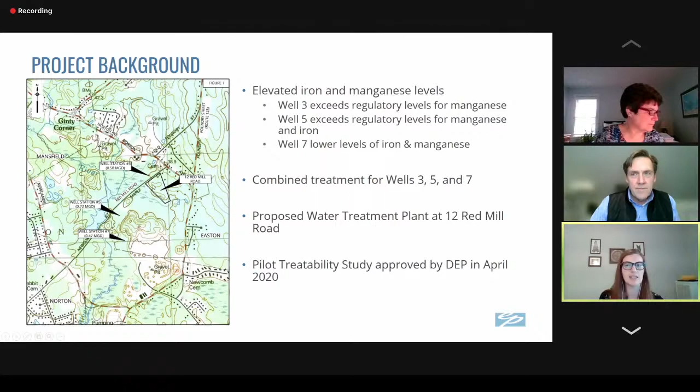We're proposing a 1.69 MGD treatment plant, which includes an administrative area, laboratory, and mechanical and electrical rooms. For the treatment itself, we have pressure filtration, chemical feed systems, and a below-grade clear well for storage of finished water and pumping. We've also reserved an area within the building for PFAS treatment to be installed in the future if needed, though not currently needed. The proposed building is a single-story, pre-engineered metal building, approximately 6,900 square feet, with 2 residuals handling lagoons, bioretention areas, and an access driveway.

So for an overview again, we have our proposed building off of Red Mill Road, our lagoons, and the 3 well stations over here. So we did look at 3 alternatives.

Briefly, our preferred alternative is to locate the treatment plant on the 12 Red Mill Road parcel. This allows us to develop most of the treatment plant outside of the Well 3 Zone 1. The treatment plant itself will be located entirely outside of the wetland buffer zones, and it's town-owned property.

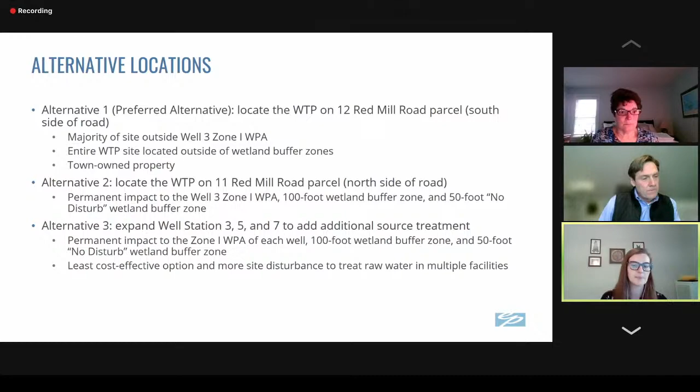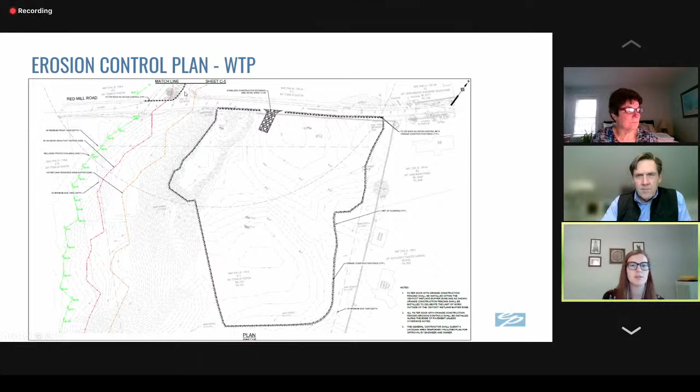So you can see some filter sock along the access road up to Well 3. And then at the well stations, again, we have the sedimentation controls along the access road and in the areas where we'll be doing some work and adjacent to the existing limit of clearing.

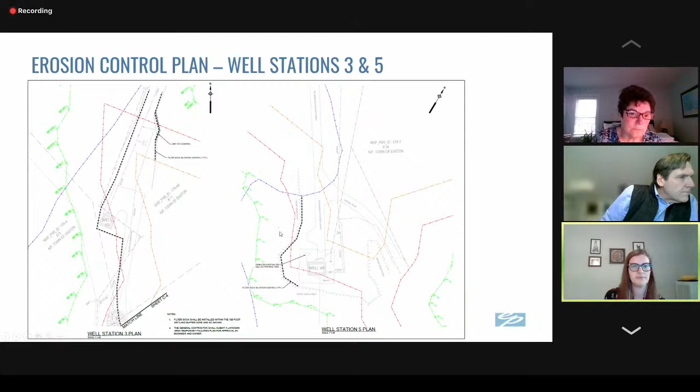And then, as I mentioned, we have 2 on-site lagoons to the south of the site, a septic system, and for stormwater controls, we have grass channels and 3 bioretention areas for infiltration to the ground.

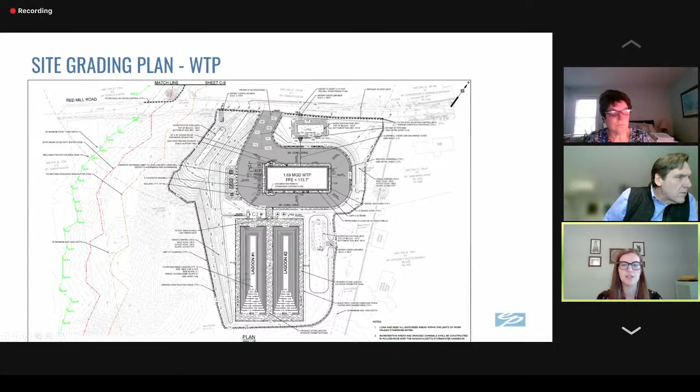So these residuals will flow into these lagoons. They're lined with an HDPE liner. So solids will settle in the lagoon while the water will percolate through a thin drainage layer and an under drain system that's all within that liner.

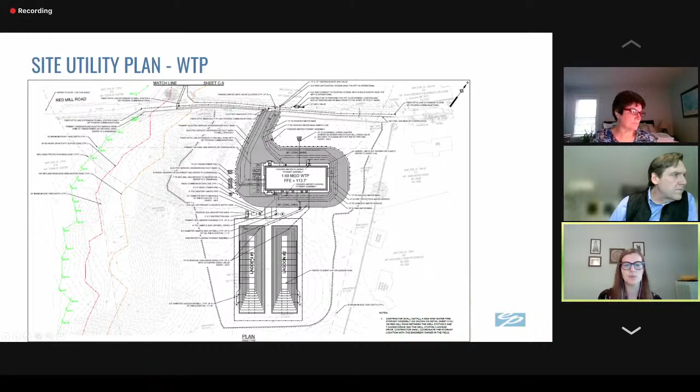The under drain will pipe the clean water to the dry wells for infiltration to the ground. And the solids that are ultimately settled in the lagoons will be excavated and disposed off-site.

And then at the well stations, we have utility work at well station 3, all within previously disturbed areas. And then at well station 5 and 7, which isn't shown, 7 only includes a utility line under the access road along there. And then at well station 5, we're proposing 2 1,000-gallon propane tanks, again on previously disturbed areas, and its associated utility work.

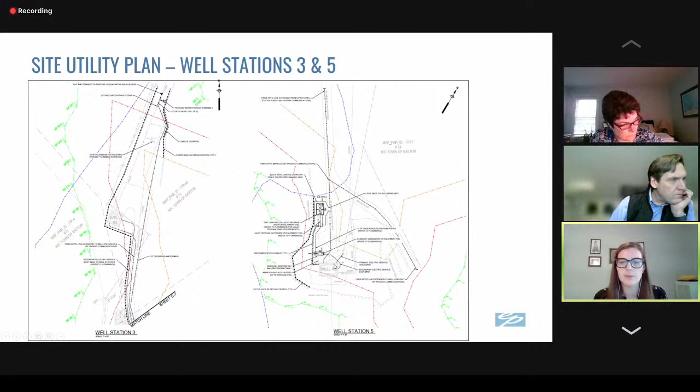I'm running through this a little bit, but I'm happy to take any questions once we get to the end.

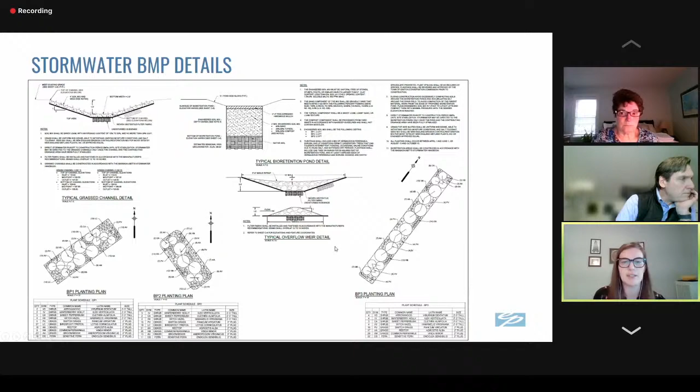And just in summary for resource area impacts, we're approximately 9,000 square feet of temporary impacts within the buffer zone only. The only permanent impacts is for the propane tank installation, which is about 185 square feet of permanent impacts at well station 5, and again, that's within a previously disturbed area. And then approximately 700 square feet of temporary impacts for utility installation to the bordering land subject to flooding. And we have no impacts to the riverfront area.

So with that, I'm happy to elaborate on anything and take any questions.

So I actually don't have any questions. The application I thought was very complete, and the erosion controls, which is our big area because the disturbance is temporary for the most part. So I think you've done a great job putting this plan together.

Does anybody else on the commission have a question? I am all set, Rory. Thank you, I'm all set too. Great job, guys. Thank you.

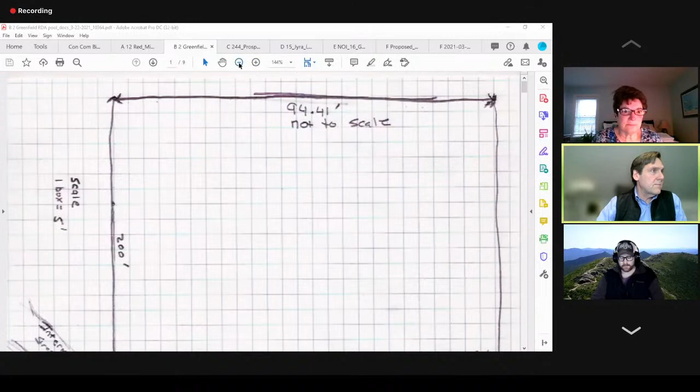Okay, so we should be able to see this plan, this hand-drawn plan. Everybody see that? Yep, I see it. Okay, great, thanks.

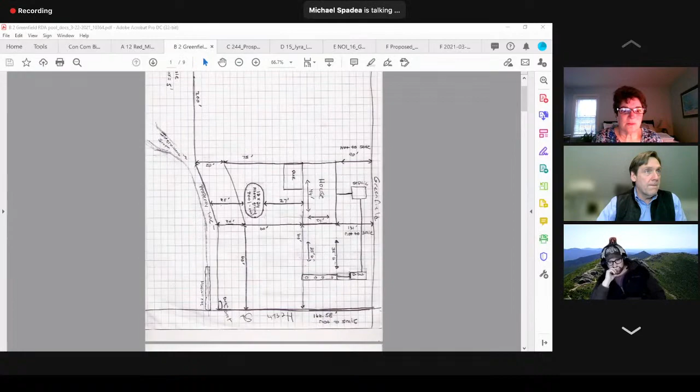So why don't you tell us a little bit about what you want to do here and conditions and whatnot? I'm just trying to get basically a 12 by 24 oval above-ground pool in my backyard, trying to keep it obviously within all the buffer zones.

I have an intermittent stream that you can see that kind of runs through my back property line. It's like right behind it, I would think. That looks like it's in the way, and the building inspector asked me to run it by you guys before I went any further.

Okay, so I am putting the wetland line, the intermittent stream he identifies is there. It has a little bit of a very narrow bordering vegetated wetland along the edge of it.

And then it's lawn back, and then it's fully lawn after that. It's very flat, a very flat backyard, and it's been in place, the house has been in place, Jeff, since 1971. Correct.

We don't have, the only application we had earlier was for a shed, that was relocated out of the wetland, close to the wetland here. It was moved away from the wetland. And other than that, there's no history on this site.

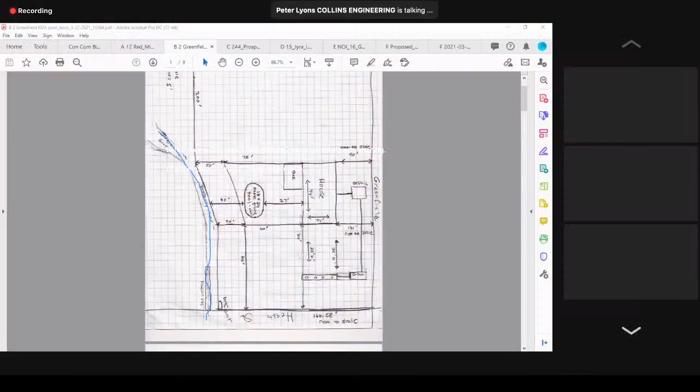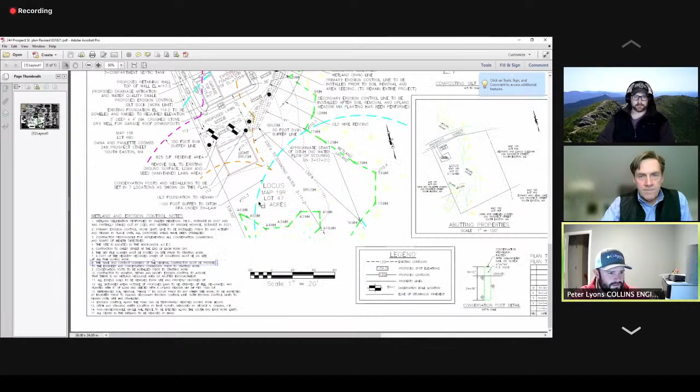Sure, I will start with sharing the screen. Can someone just confirm you can see it for me? Confirmed. Awesome, all right, I'll start with the close-up picture and give a little bit of history, and then we can move around the plan as it makes sense. So this is a...

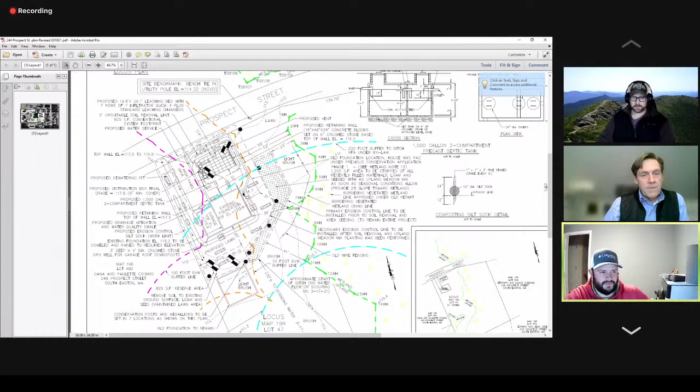...revitalization of a 2009 project we were involved in, initially for the raising and reconstructing of a single-family home and the associated septic system in the front yard. Quick history of the lot: back in 2009, this project was approved through conservation, and the foundation actually went up, the stick framing was in place, and the current owner had gone bankrupt at the time. So over the years the building deteriorated, and now what's left out there is simply a concrete foundation with a gravel floor and a bunch of fill around the project.

Just looking at the plan quickly, we're proposing a relatively smaller single-family home, and right behind it is a red outline, that's the existing lot, which was in place prior to 2009. Now the existing foundation, as shown, is actually on the site, and the existing contours reflect what's there today. So what we're doing is basically looking to finish developing the site by bringing the building up, building it out, and installing the new septic system pretty much as originally proposed.

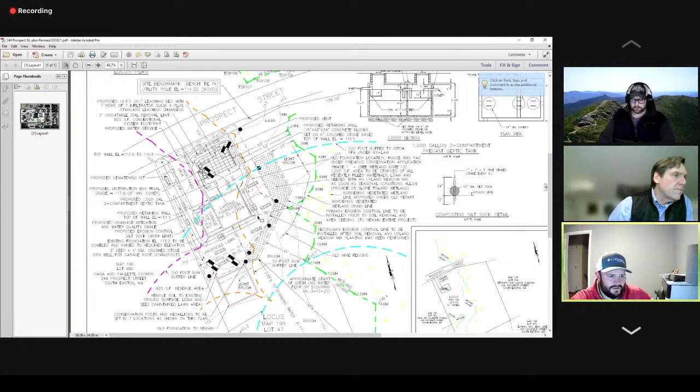Just a reminder, that's kind of in place. Otherwise, we'd push to move that out. With the original proposal, wetland flag 8 was kind of more in line with 6 and 9.

So, 12 years ago, we had originally proposed the 50-foot separation, but now based on the change to the wetland, the house location didn't change, but the wetland did. So we're proposing kind of a two-stage process.

One is going to be removal of a lot of the filled materials that encroach into the wetland buffer. So we're looking to strip that down a couple feet in some spots, loam and seed it with an upland meadow mix, and allow that to naturally revegetate.

We would then be reestablishing a work limit between that and the proposed work, kind of establishing the lawn line at that point, going around the project.

The septic's going in the front. Proposed driveway to a garage.

We will have a surface water swale to the west side of the driveway to bring any additional surface water down and redirect it toward the back of the site, kind of matching the original runoff patterns.

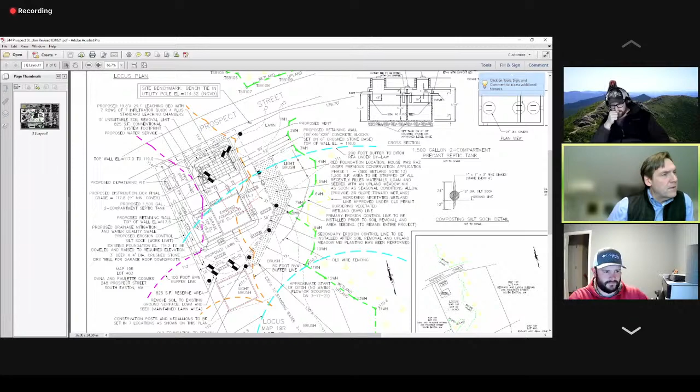So Peter, what's proposed between the area where you're going to change the fill and the lawn area? Is that a retaining wall that's going in there? What are you looking at right here? Exactly. No, that's not a retaining wall.

This drawing doesn't show it great, but one of those lines is basically the edge of the seed, and then the 23-foot line, that's our work limit. On the CAD version of the plan, that line's thicker where the erosion control is, so basically we're proposing seed right up to the erosion control.

And then once that's taken off, we're going to provide an additional erosion line to the western edge of that seeded area.

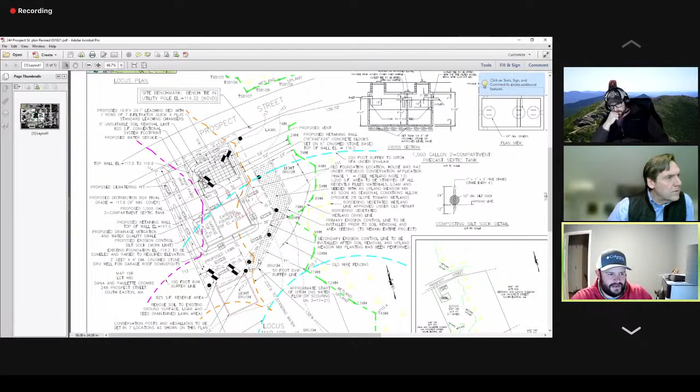So how are you going to make the transition from the house to the level where... right now it's about a 3 or 4 foot drop, right, where that fill is? It is currently, yep.

So we're looking to strip out that material pretty much back to the foundation. Ultimately it leaves us with a lot of concrete reveal on the foundation, but without dragging the grading closer to the resource areas, that's kind of just going to happen.

No, I understand it better now. Yeah, so looking at the house from the wetlands, it's basically going to be a flat area till you get to 6 or 8 feet of the house, and then it's going to be a 3-to-1 up to the foundation.

Got it. The one thing I do want to point out is Peter pointed out that the previously existing home on this would have been, under the current conditions, 31 feet from the wetlands, and this home is 36 feet.

So as Peter said, the original design it would have been 50, but the wetland has changed. So short of taking up the entire foundation, I think they're probably doing about the best they possibly can here. It was going to be in a better position than it was originally.

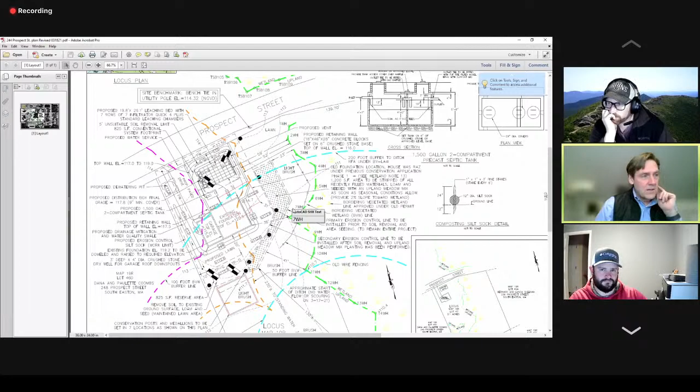Having been out on the site, this is probably one of those few sites in Easton that appears to be an abandoned site. You really don't see this very much in Easton, and I can't imagine what it looked like when it had actual lumber up on the foundation.

Getting this house finished and built is certainly a big improvement for sure.

So I think the one thing, Peter, maybe we could just cover it - I think I know what is going to be said, and I've read the packet and whatnot, but could you just give us a little bit of the rundown on the waiver, since we're working inside the buffer in the ACEC?

Sure, let me just grab the report quick. Basically, I'll just skim through it quick, and if there's any questions, stop me. We're looking at any reasonable alternatives.

There would be alternatives if the existing foundation weren't already in place, but we don't really have a lot of room. In order to develop this lot, we need to fit a house and an appropriately sized septic system. The way everything's spaced now, we're as close to the road as we can be, and as close to the septic system with the house as we can be. So we're really doing our best to tuck everything into that furthest jurisdictional corner of the lot.

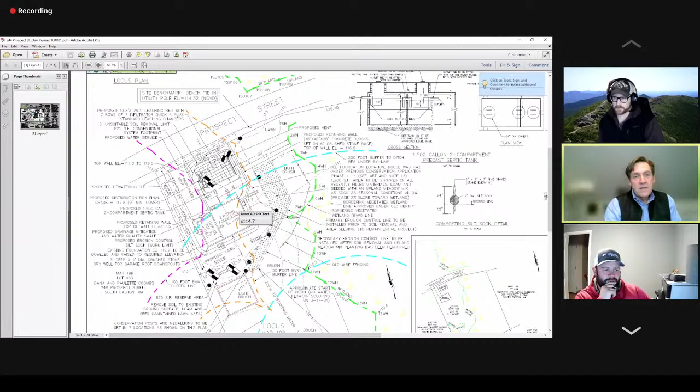Yeah, proposed. I think it's really important for us to consider this was a previously disturbed lot. It had a house on it, so it's not like he's trying to develop an empty lot and fit a house on it. This had a house on it.

It is, like you said, kind of a weird way of going about it, but the alternative is to knock that foundation down, and you really don't have any options there. Even if you knock it down, you're only going to improve it by a couple of feet. You don't have a ton of room here, so that's not really a practicable option.

Secondly, we're looking at minimization and mitigation measures. As we said, we're removing a large area, 1,200 square feet, to be stripped of fill and restored to more of a natural condition. Right now it's not a loam covering, it's just loose subsurface fill, not really supporting vegetation.

As far as accommodating public interest, I do the survey work out here, and I had at least 2 or 3 of the neighbors say, 'Oh, thank God they're finally doing something with this, this is an eyesore to look at. We don't really care who buys it or what happens, but we would like to see something happen with the lot.' So I think that tells us the public interest is cleaning up this eyesore that's been around for 20 years now. So I think that's kind of a no-brainer and really the only answer we have.

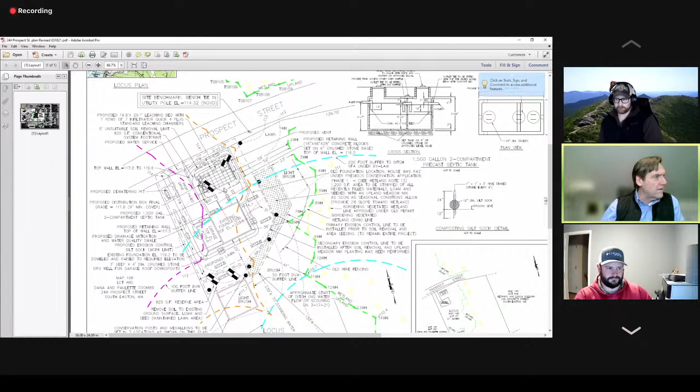What's the material? The driveway is meant to be impervious asphalt, but you're going to direct it away from the wetlands anyway. Yeah, ultimately it's going to end up down there, but we're providing a grass swale system, basically with the longest run we can before it would intercept the wetland area.

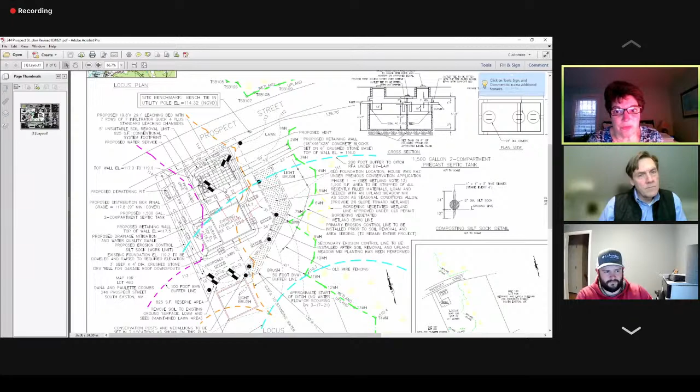Okay, Andrea. All the abutters were notified. I just wanted to clarify a couple points that Peter made. One was that the area of fill he's taking out was not authorized by the original decision. In the construction of the foundation that's there today, the contractor went beyond the approved limit of work and created this swale. By creating this mound of fill, the wetland moved forward.

It wasn't, you know, it was the fill that was put there. So I think it would not be quite accurate to say that he's returning it to original — what would have been the original. This fill is not in any way mitigation. This is just bringing back what was never authorized. Got it — restoration. Understood.

The second thing is that permanent markers are going to be put at the top. In speaking in the field, I understood that was a post and rail fence. Because there's a very limited amount of lawn area, a limited amount of active space around this house, you're not going to be able to maintain your limit of work with markers.

The third thing is that the stormwater discharge — Peter described it as just roof runoff that's being collected — but in 2008 there was a stormwater analysis done, and all of that swale was designed to take all of the driveway and all of the roof runoff was supposed to be infiltrated. So I certainly hope that the engineer is going to offer to do as much as was done in 2008.

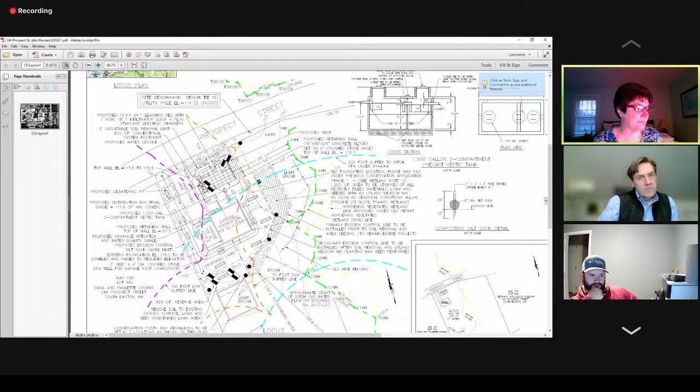The second thing was sustainable lawn practices weren't put in here, and to be consistent with projects that you've been approving, I understand the alternatives analysis is limited by past decisions. I do encourage you to consider that the site is very low quality wildlife habitat now, and you could do buffer zone restoration. And if you didn't consider that eliminating a hazard created by someone else is enough public interest for the site, I honestly can't make a recommendation to approve this project as proposed.

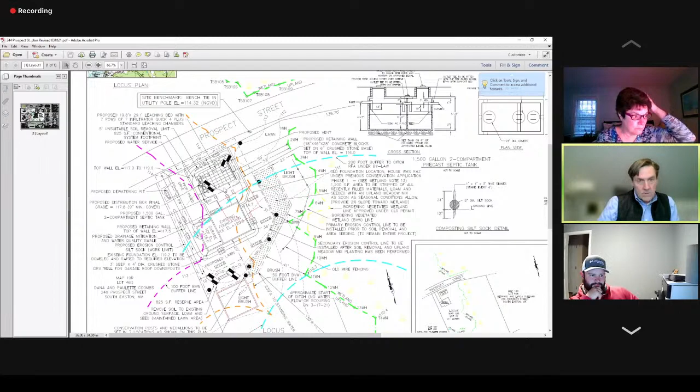Okay, I'll circle back to that, I wrote some notes down. I just want to give other commissioners a chance to make comments or ask questions. John, you've got the floor, buddy - this is more your territory for sure.

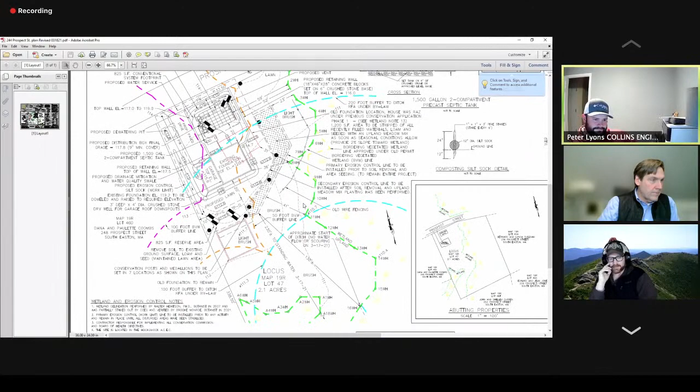Thanks, Mike. Peter, do you mind scrolling down a bit in the plan? Yeah, that's good right there. So I guess my question is, what's the purpose for leaving the old foundation there, down past the markers?

That old foundation is almost non-existent, just barely sticking up above the existing grade. I honestly didn't even notice it the first time I was out there. Okay, and we subsequently added it to the plan, kind of just as proof that the site has been developed historically rather than having any real engineering implication. Right, there's no reason to remove it, otherwise you're just disturbing everything around it.

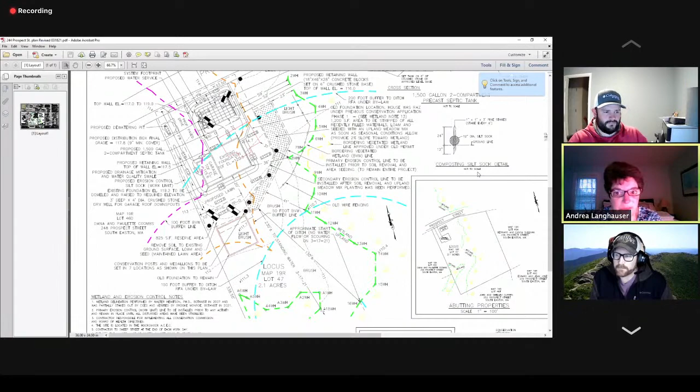Right, I guess my question - it's got a gravel base in between it. Why not extend part of that restoration towards that area as well, and maybe instead of grass, plant some sort of wildflower seed mix that you'd only mow maybe twice a year, or once every year? That provides a benefit for habitat potential within an ACEC. Just some food for thought.

Okay, Mike, anything? Nothing for me, nope.

So I think that when the calculations were done on the hydrology of this site back in 2007, I remember a presentation of data and some handwritten calculations by one of your engineers. Did that include runoff infiltration of the house roof as well? To be honest, in 2007 I was just wrapping up high school, so I wasn't involved in this. But Andrea, do you recall? That's the way the staff report was written - it was full building.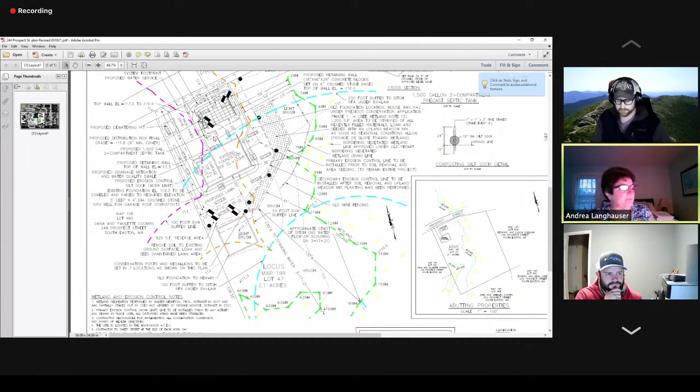So I think if that's the case, Peter, given where we're trying to put this house, if we want to infiltrate the roof runoff from the main portion of the house as well, or design whatever infiltration you're using to handle all the roof runoff.

It's definitely an option. One thing we were discussing was that by lowering the site down so much in the back, we don't really offer ourselves many underground infiltration options. We're proposing a 113 contour behind the house, so that's not going to be more than a foot or two above the wetland line vertically. We could accommodate more infiltration, but it would ultimately probably result in bringing the grade up a little more - so it's a balance. We don't have room up front to do it, and we try not to do that stuff under the driveways. So it's an option, but there's not really much room.

Great, so the alternative is to go back and redo your hydrology calculation. Yep, and that's something I haven't personally looked at. It was explained to me that at the original approval, the subsurface system was designed only to accommodate the increase in flow from the historic building and the new proposal - but I could be mistaken on that. No, I think that's how it was explained. I think that could be accurate, but someone's going to need to address that issue to clarify it. And if it is accurate, that's not how the commission interpreted it. Okay.

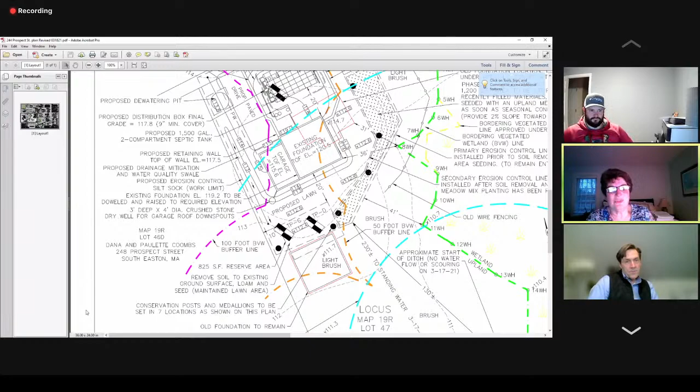Yeah, I think you can make the argument that it was raised because it was condemned. It had fallen, and it's 23 years ago. It was not... the permit was not kept alive.

I understand that. I'm sort of respecting the spirit of the prior permit, but understanding that to us this is a brand new permit. But at the same time, I do want to account for some of that consideration here. That's my viewpoint.

So let's try to give you some perspective here to take back, because there's a bunch of questions. I think we probably should have a calculation about impervious surface increase on this, and then talk about what the offset to that should be—whether that's enhancing the area where the former barn was, putting it back to naturalized habitat that could be used, or dealing with the roof runoff from a sense of this.

Just for the record, Commissioner Lundin did join us just now. So respectfully, I'll ask that she not vote on this, although I think we're going to continue, unless the applicant wants us to go to a vote.

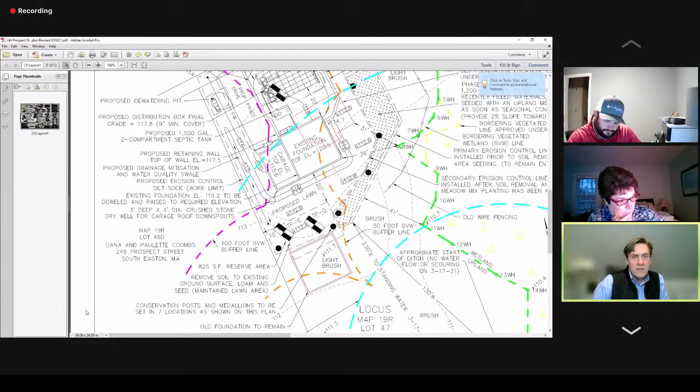Does anybody else have anything we might consider? I think you touched upon it, Rory. Good to go.

I don't think, Peter, much of this is going to come as a surprise to the team. Most of it was discussed with Andrea out in the field. Yeah, no, we were expecting plenty of comments. It's kind of a tough project, so we got some input, and we can definitely look into those things and come back with some more answers for you.

So from my perspective, there's an opportunity for us to give some small amount of credit for the fact that there was a house on this lot 20 years ago. It's hard to give you full credit for it because it was 20 years ago—another 10 years and maybe it even goes naturalized, except for the hole in the ground. I think it would certainly benefit everyone that we get this lot developed. We just need to stay within the confines of the regulations.

Yep, understood. So, any public comment for 244 Prospect? Seeing none, I will assume you want to continue, Peter. Yes, please, to the next meeting. We should be all right for the next one.

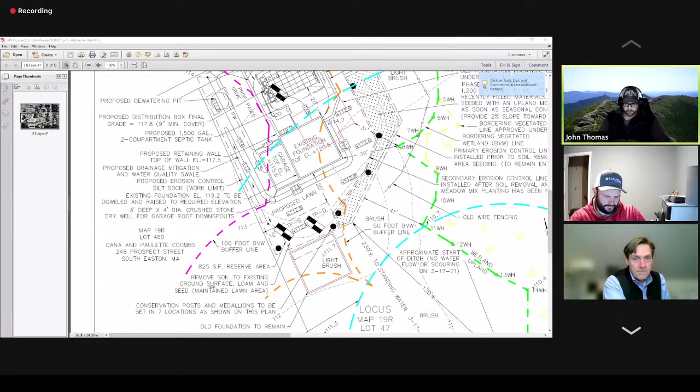Okay, so I make a motion to continue 244 Prospect to April 20th. That's a Tuesday, Peter. Thomas, second. Roll call vote: Kallfelz, aye. Beatty, aye. Thomas, aye. Thank you. And Carol, you want to abstain officially? You're muted, Carol. Lundin, abstain. Thank you. So Tish, we got 3-0-1 to continue. Thanks, Peter.

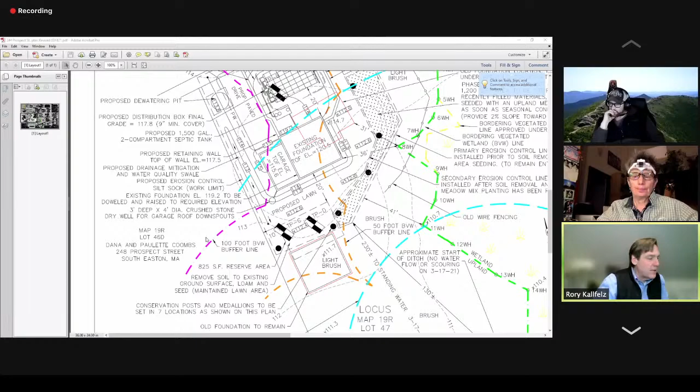Next one up is 15 Jyra Lane. This is a notice of intent to upgrade a single-family septic system. Right, you bring up the plan. It's not it.

All right, let's try this. Bear with me here, I'm trying to get the drawing up for you.

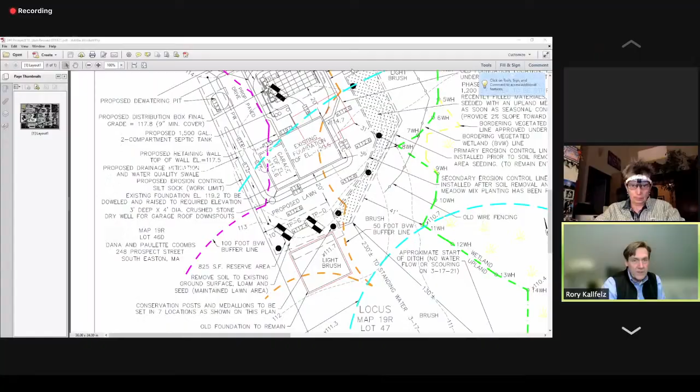All right, I'm ready. Can you guys see my screen again? Awesome, so this one's a little more straightforward. This is a septic repair on an existing single-family home on Jyra Lane.

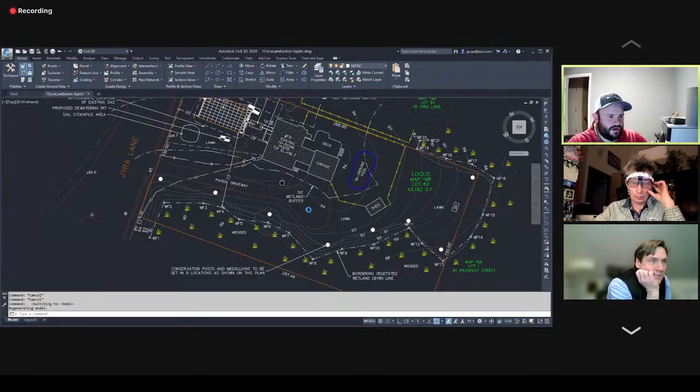We have a bordering vegetated wetland that wraps around the south and eastern portions of the property. The 50-foot buffer cuts through the middle of the site, and the 100-foot buffer is just the northern portion of the lot. Our proposal is to replace what's there, including a new 2,000-gallon septic tank and a 25 by 41 leaching field.

This is all being done in existing lawn area outside the 50-foot buffer. Our work is as close as 73 feet to the wetland, and our erosion control looks to be just outside of 50 feet. We have provided stockpile areas and dewatering outside of the 50-foot buffer in the existing lawn areas. As always, we provide erosion control wrapping around pretty much the whole project.

We show conservation posts around the edge of the existing tree line. There's a total of 8 shown on the plan, spaced about every 30 to 40 feet around the lot. I guess that's about it. Any questions?

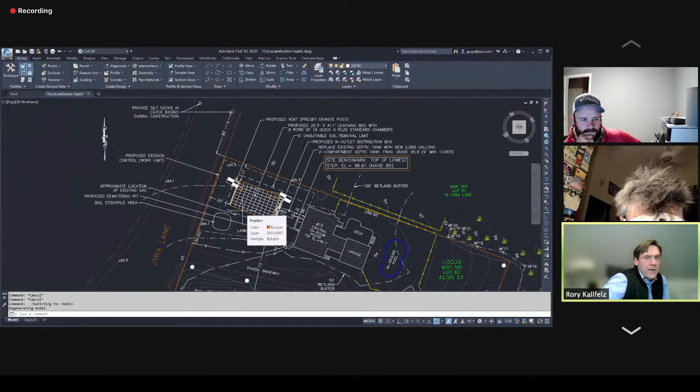So Andrea, you want to give us a summary before we get into ours? Sure, very quickly, the abutter notifications have been posted. If you could please lift your site a little bit to the north so we can see the full drive and the back property line.

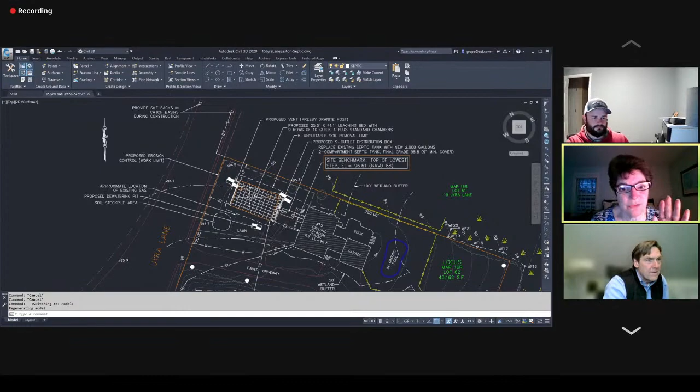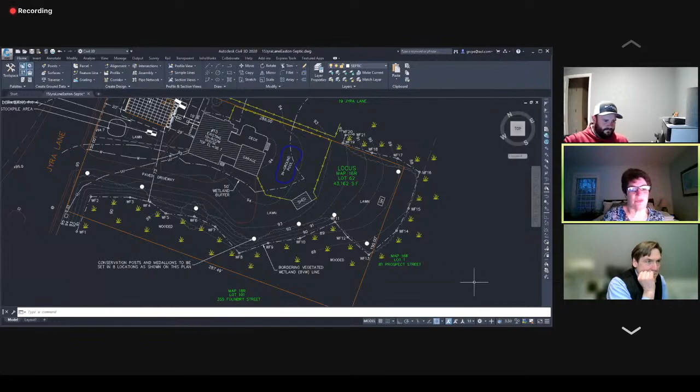The reason I want to point out the back property line is that the lawn area extends to the wetland line, and that is on town conservation land. Other than previous non-compliance with the lawn area, the rest of the BVW is at the base of a slope, so there's less incursion in the wetland area. But other than that, the project is compliant with the simplified septic policy. It's obviously as far as you can be and still be on the site.

Okay, and I think, Peter, the applicant obviously should stop mowing that portion of the property. I don't know if you've already staked those conservation posts. Usually you guys do. They should be out there, yeah. I didn't go out there yesterday because it was Easter Sunday, so I didn't go out to the property.

So we just need to get them to not mow beyond where those conservation posts are going to be. That obviously will be something that gets checked at the certificate of compliance stage. So let's start that right away. I have no other questions.

Anybody have any questions? Do you think an extra post next to the shed would help, just to keep that designation? That's a good idea, I think you should add another post right behind the shed there. I was actually also thinking of another post on the northeast corner, the top of the plan where wetland flag 19 is. So why don't we add 2 posts there? I know it's a lot of posts, but it's linear right there.

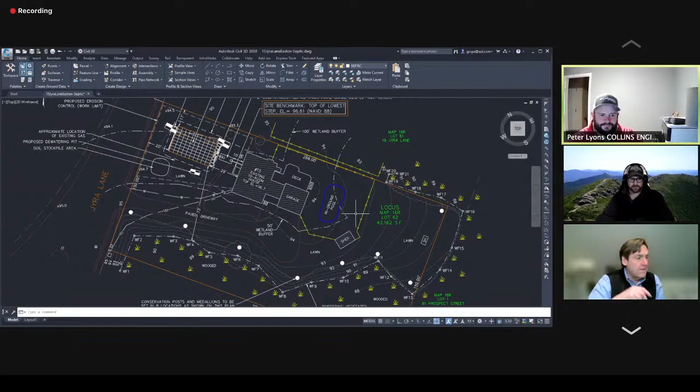Anything else from anybody on the commission? Thanks, John. Sure, this is Carol. The lawn going up to the BVW line - I think by definition, an alteration to a resource area includes use of pesticides. So I'm wondering if we'd like to condition this so that there shall be no use of pesticides within 50 feet of the BVW, at least. Because you can't use pesticides in any buffer zone, according to the state rules, without a permit. Okay.

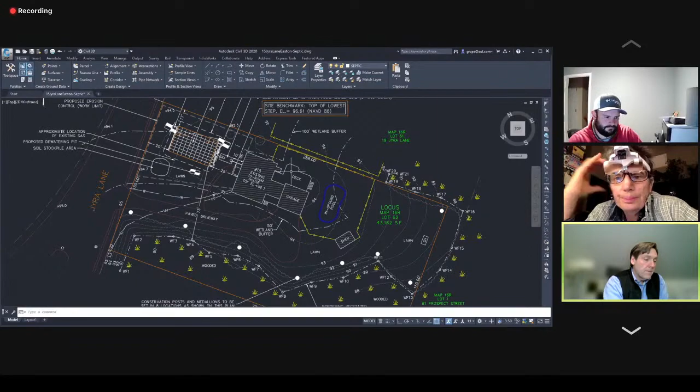Anything else? Mike, you all set? I'm all set, Rory. Thank you. Any public comment for 15 Jyra Lane? Seeing none, I assume you want to close? Yes, please.

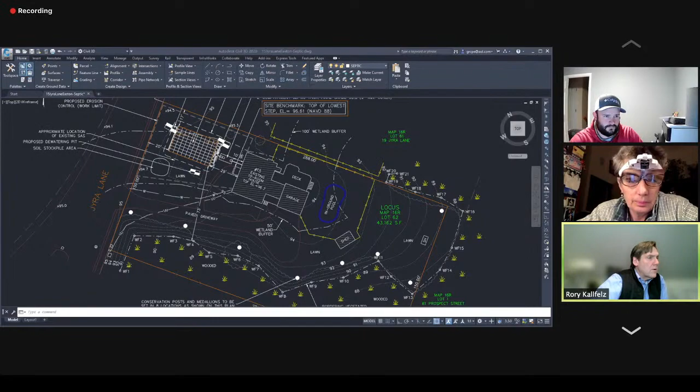So, make a motion to close the hearing and issue a permit for work and order conditions, noting no dumping in the wetlands is a perpetual condition.

Permanent markers noted on the plan, plus 2 additional ones: one at wetland flag 19, and the other behind the shed at the rear facing the lawn. The applicant should not mow beyond the permanent markers - that's a no-disturb zone. Additionally, no use of pesticides within 50 feet of the wetlands.

Spady, a second. Roll call vote: Kallfelz, aye. Lundin, aye. Spady, aye. Thomas, aye.

Excellent. Okay, next up is 16 Gawain Road. This is a notice of intent for upgrade of a septic system.

Right, we can all see this one? Yep. Okay, as mentioned, this is a notice for a repair of an existing single-family septic.

We have a wetland in the rear of the property, a 50-foot buffer behind the house, and the purple line is the 100-foot buffer. The system is going in kind of a clearing between the 50 and 100 foot buffers.

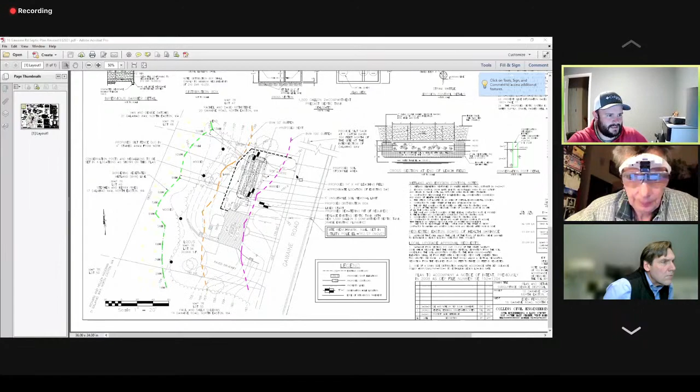Approximately 20-25 feet off the bordering vegetated wetlands. We've staked out an erosion control line in the field, as well as the proposed septic system and conservation post locations. We provide dewatering and soil stockpile areas at or outside of the 100 foot buffer whenever possible. That's about it. Our erosion control is an 8-inch straw wattle that surrounds the project, including the site access.

I'll take any questions now. Andrea, you want to give us your summary?

The abutters were properly notified as posted to the application. The septic repair was originally approved in 2007, and the wetland line has been upgraded, has been confirmed since that point. There's a lot of man-made debris in the wetland, so I believe those permanent markers will be a good addition to the site.

Originally, the order in 2007 had no road salts, a slow release fertilizer, and herbicide and pesticide use not allowed within 25 feet of a wetland. In addition to that, those were perpetual conditions. There was also supposed to be a deed restriction that notified folks that there was no filling in the wetland without prior authorization by the commission.

The order was not recorded, so I don't believe any of that work was done. Other than the debris in the wetland, it is consistent with the simplified review policy.

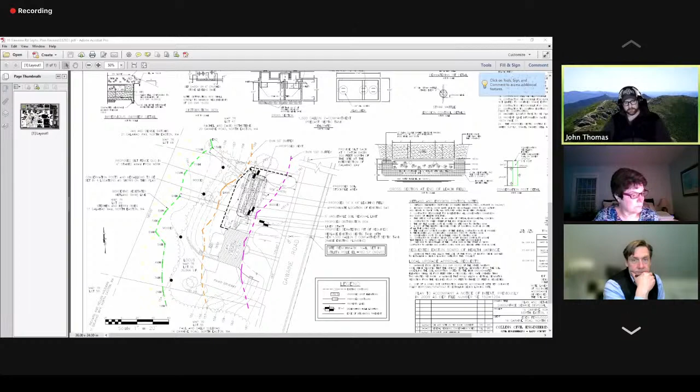This is Carol. I'd like to see a change to the conditions that were no pesticide use within 25 feet. As we did in the previous application, I'd like to see that increase to 50 feet. As we know, by state, by the WPA, pesticide use in a buffer zone is an alteration, and that cannot be done without a permit. So I'm in favor of pushing that out to at least 50 feet.

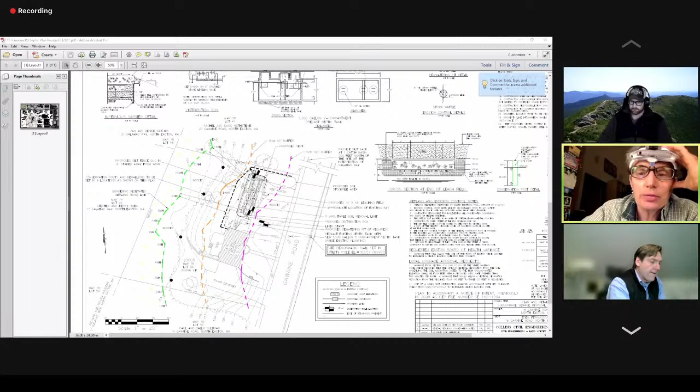So Andrea, can you confirm that pesticide use being an alteration, and give me a citation? I don't have it. I will look into that.

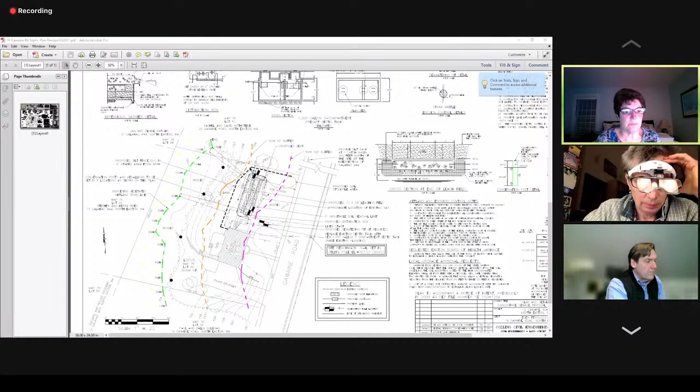As I said, past commission said no pesticide use within 50 feet, and your sustainable lawn practice is usually you put that in place, which suggests other methods to keep your soil and growth moist and not need herbicides, pesticides, or anything but slow release. So I'll come up with the citation after the next meeting, if that's okay.

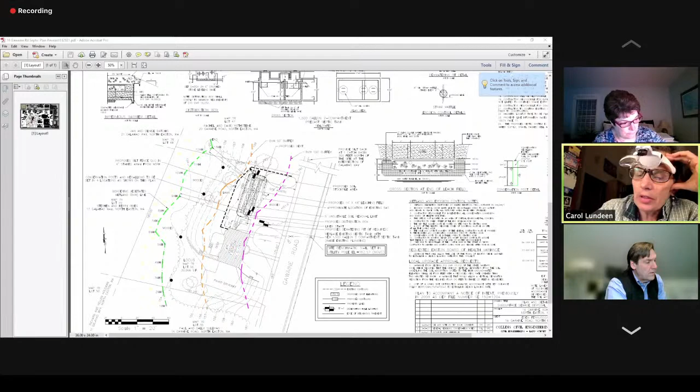Yeah, if I may, I can tell you where it is - it's in the definition section of the state laws or regulations. It's easy to get to. 1004 is what you're suggesting. Yeah, I don't recall it being interpreted that way, so I'll double check. Thank you.

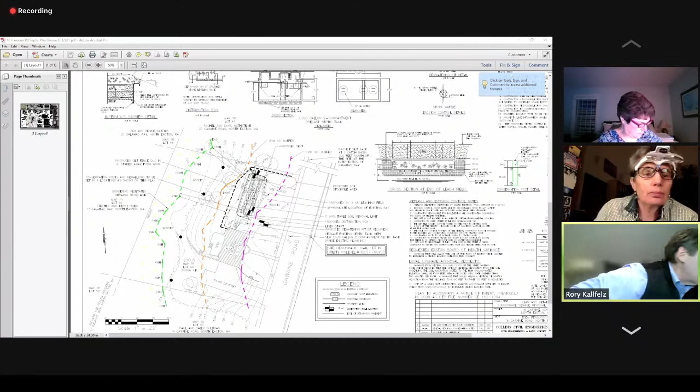So under the sustainable lawn practices, what's the guidelines we give them at that point? Minimal use. Hold on, can we check on that? I can only check on one thing at a time - I was checking on alteration. Okay.

So I'll read alter under 1004, if you don't mind. This is just for our education here. Alter means to change the condition of any area subject to protection under MGL Chapter 131, Section 40. Examples of alterations include but are not limited to A, B, C, D, a bunch of things. And it's provided that when the provisions of 310 CMR 10036 and 10053 or 333 CMR 11039 have been met, the application of herbicides in the buffer zone in accordance with such plans as are required by the Department of Food and Agriculture pursuant to 333 CMR 11 right-of-way management.

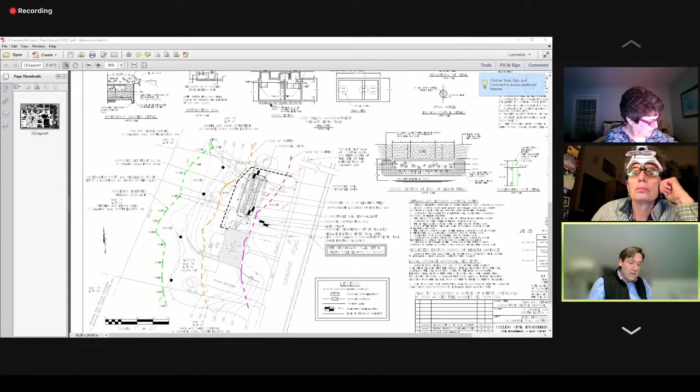So the one question I would have is whether or not 310 CMR 10036 and 10053, or 333 CMR 11039, are being triggered here. Because I see where it says that application of herbicides requires a Department of Food and Agriculture permit here, but...

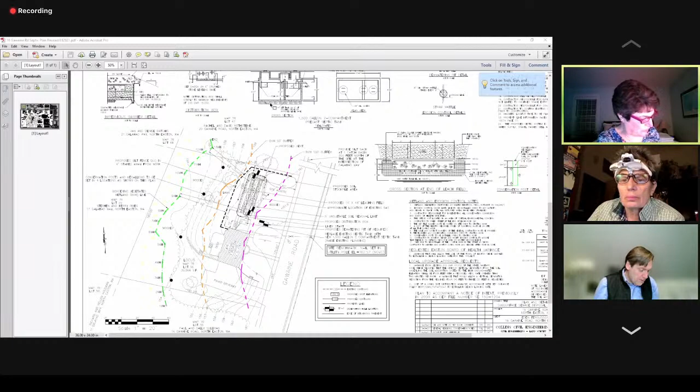There's a key piece there, Rory. Can you take a look at that alteration? It says it is not an alteration. If the application of herbicides—it doesn't say pesticides—the application of herbicides, if done in accordance with the Food and Ag right-of-way management, is not an alteration of the resource area. So this is for right-of-way management where they are allowed to.

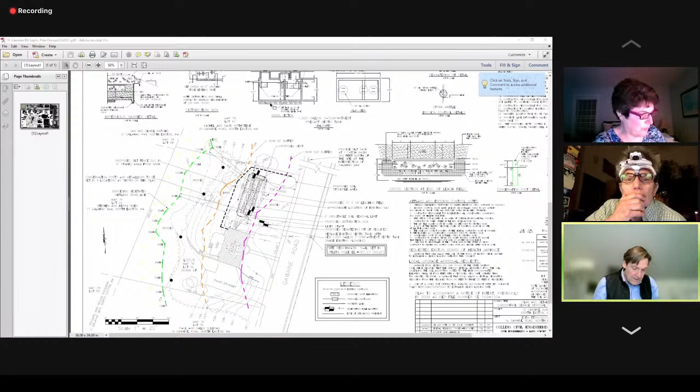That's the transmission lines. So can we reach out to MACC and see whether or not that's meant to imply the opposite? It's silent on that—it talks to herbicides in right-of-way management as not being an alteration. It doesn't speak to pesticides, and it doesn't say explicitly that other than that it's an alteration.

From my recollection, pesticides are addressed in the Wetlands Protection Act, which surrounds agriculture and the raising of animals, right? And limiting those completely from those kinds of areas, if I recall correctly. And I don't think we have that here for this condition. So I don't know—let me give more thought to that whole pesticide issue.

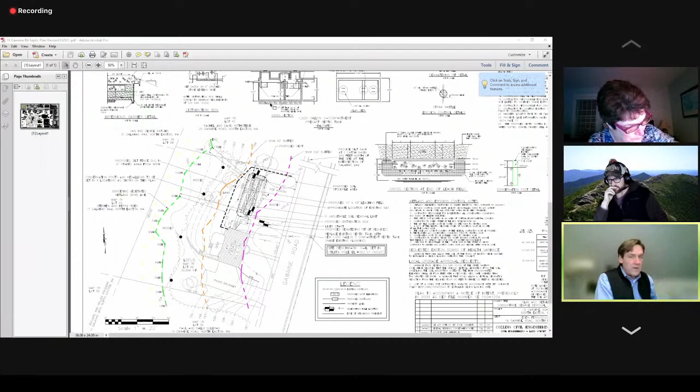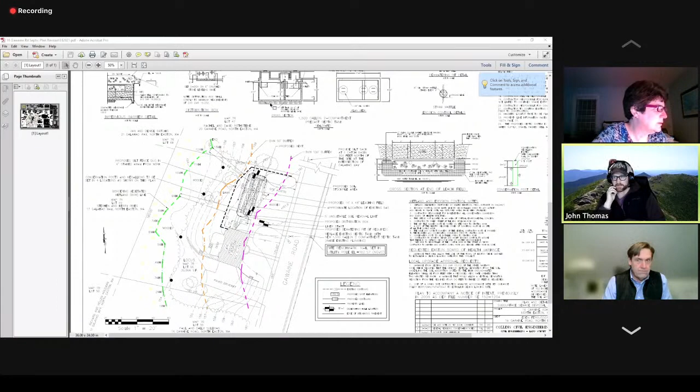That's all I'm asking for here. I'm not saying I'm opposed. Through the sustainable lawn practices, we're already trying to encourage minimizing the use of any sort of chemicals, whether herbicides or pesticides. But I just want to make sure we're on solid foundation if we start implementing this as a regulatory device, as opposed to our sustainable lawn practice. It would have to be at the local level that we're administering this practice. We can't be referencing the act if it doesn't specifically state that.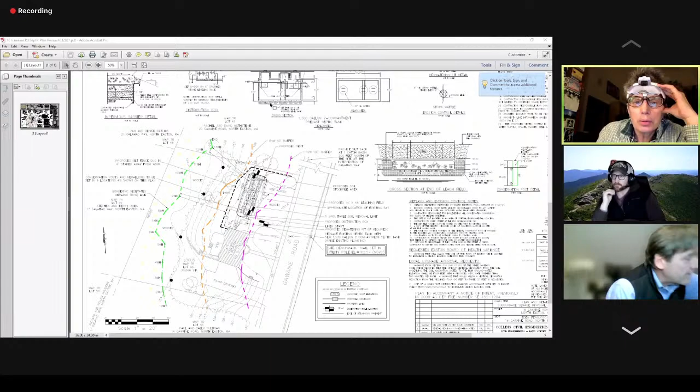I agree. I'm looking at the town 5034 definitions, and their definition of alter, number 11, addresses pesticides and herbicides. You had cited the state definition, that's why I'd gone to the state. Do you want to table this discussion for another meeting to get the answer to that? I'm sorry to be flat-footed on this. Give me 15 seconds.

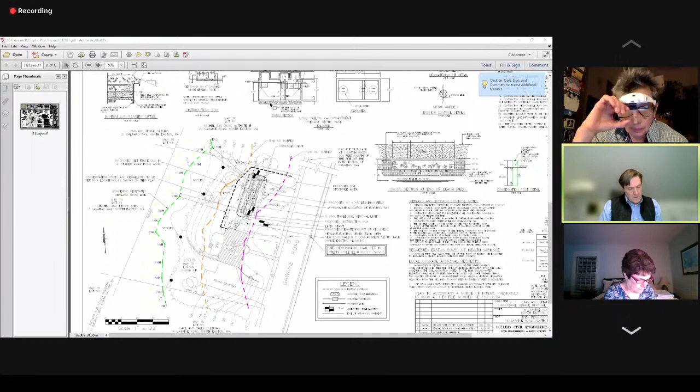5034. Okay, well, I think it's a lot to take in here and try to keep on track. So rather than get into it further—we've already had a long discussion about this—I'd rather take a couple weeks to figure out where this fits into our use of the regulations and our decision-making. It's hard to put it all in context at this point. So, any other comments?

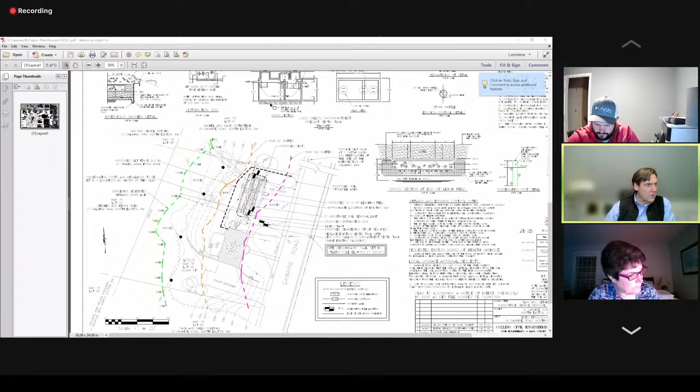Okay, I'd like to make a motion. Peter, I assume you want to close. Yes, please. I'm going to make a motion to close the hearing, issue an order of conditions, noting no dumping in the wetlands as a perpetual condition. Permanent markers noted on the plan, marked with a no-disturb zone. Follow sustainable lawn practice guidance. No road salts.

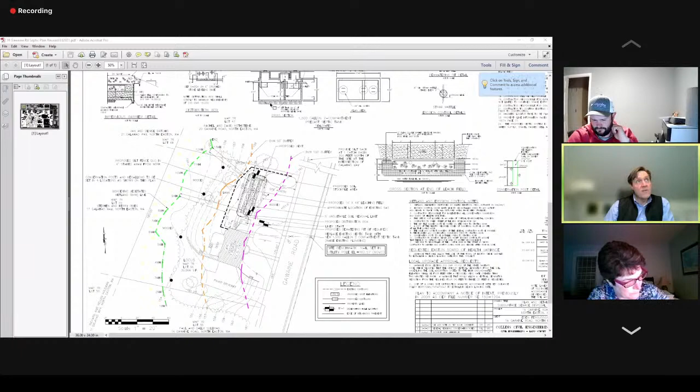And I'm going to split the difference here: no pesticides within 25 feet of the buffer zone, or within 25 feet of the wetlands. Spady, second. Roll call vote: Kallfelz, aye. Lundin, abstain. Spady, aye. Thomas, aye.

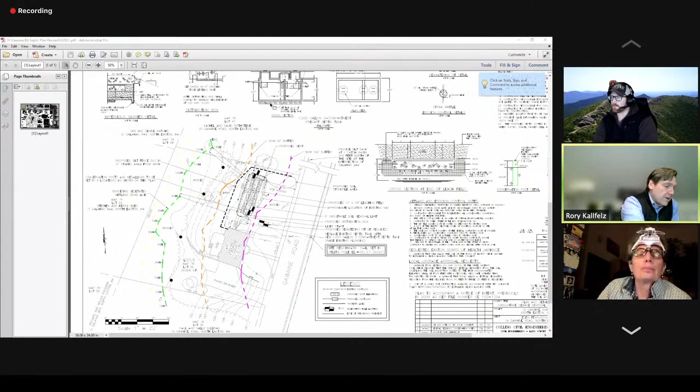Next up is 91 Summer Street, and we're going to continue 91 Summer. Is that correct, Andrea? The engineer is unable to attend this evening, so he asked for a continuation to April 20th. My apologies, John, I didn't find out until this morning.

Motion to continue 91 Summer Street. Lundin, second. Roll call vote: Kallfelz, aye. Lundin, aye. Spady, aye. Thomas, aye.

345 Center Street, a certificate of compliance, a partial certificate of compliance. Andrea? Lot 8, I don't know if you have the plan up. I can, yeah. Thank you. Lot 8 is at the Goodspeed Estates, the one down the common driveway closest to Cedar Drive. You saw it a few months ago when they came in to modify their house, and you allowed that as a minor plan modification. Now they're asking for a partial certificate to release them from the subdivision order. The minor modification was of the subdivision order.

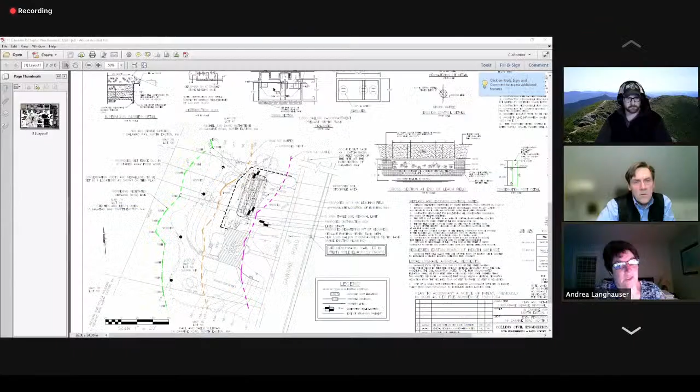There is a homeowners association that has been required of the subdivision, but not enough lots have been sold yet, so the responsibility to complete the common area work, such as the roadway and the invasive species work, is the responsibility still of the developer, and we have that confirmed. Eventually, it'll be the homeowners.

So, I mean, this is just the new purchaser that is looking to get released from any liability for that stuff.

Yeah, and I'm suggesting that it's somewhat temporary. Eventually, maybe the work will be done by the time the homeowners association is in place. So is Mike Khoury, is he the purchaser?

Oh, hand raised. Yeah. You want to allow him to talk then? There you go. Mr. Khoury, you have something to add to this?

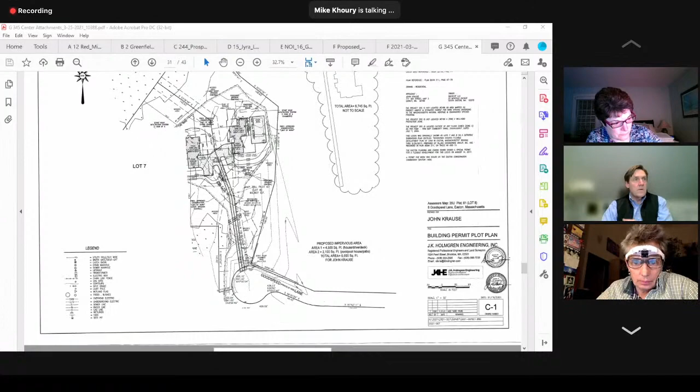Hi, Mr. Chair. My name is Mike Khoury from Madoff and Khoury in Foxborough. We represent the buyer of Lot 8. The buyer's lender understands that the knotweed remediation, or the clearing of the knotweed, is going to be a long-term project, and the lender's fine with that. But the lender wanted to get some kind of confirmation, hopefully a partial certificate of compliance, with regard to the other specific matters concerning Lot 8. And in response, the seller filed an application for a partial certificate of compliance.

Yeah, I mean, I don't think that we as the commission have... I mean, I think that this developer has done everything we've asked them to do up to this point, and certainly I think we can have a discussion about it.

I appreciate giving the perspective of why we're getting asked for a partial cert on this. I think that given the conditions, I don't have any questions about moving forward as long as we agree what we're giving the partial cert for, related to the things that the agent was mentioning here. So, does anybody have any questions?

Yeah, Carol? Thank you, Rory. I guess my question is, giving a partial cert, is it in the public benefit in some way? Or does it harm public benefit in any way?

It's a right of the applicant to request a certificate when work is completed at any stage. He is required by law to get a complete certificate of compliance when all work is constructed, but the applicant has a right to apply at any point in time. It's not a public interest issue. It commonly occurs when there's a transfer of land or property, when there's work that's been done on the property.

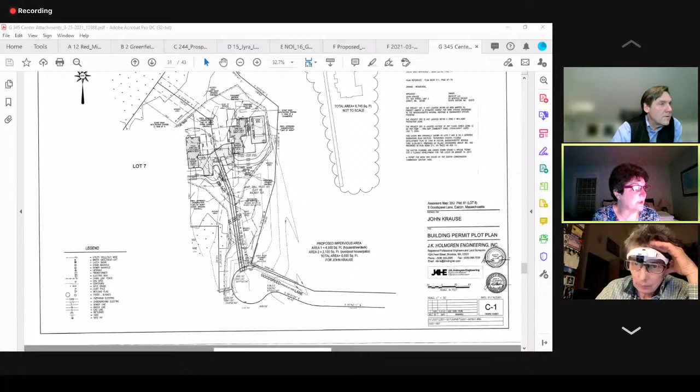So, Andrea, what can I reference in your staff notes to say exactly what we're giving the COC for, or can I just say as noted in the staff report? If you say as noted in the staff report, then I will identify in item 5 the work that has been completed, and I will also identify in item 6 the work that needs to be completed, so it's very clear what's approved, what's not approved. And then there are items that were identified as special conditions that are perpetual, which you would expect to be no road salts, no dumping in wetlands, and maintenance of the stormwater management system will continue to be a responsibility after any cert's issued.

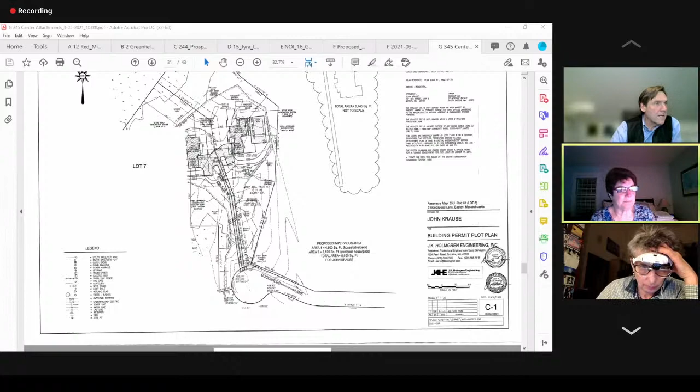Gotcha. Okay, so I make a motion to issue a partial certificate of compliance noting the items in staff report number 5 have been completed.

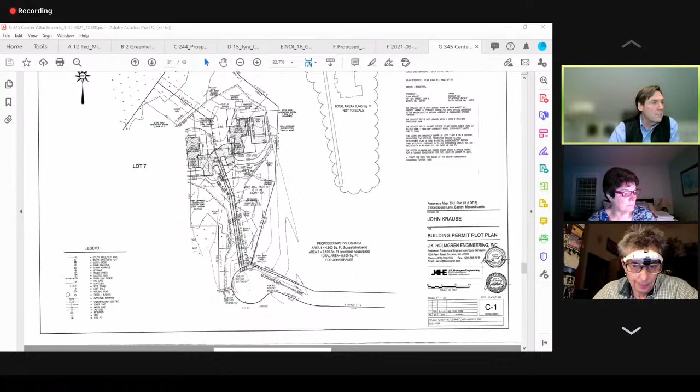Items in the staff report on number 6 are to be completed. Also noting perpetual conditions from the original order: number 55, no road salt, sodium chloride, or other de-icing chemicals; number 56, no dumping in the wetlands; and number 57, maintenance of the stormwater management system. This is for lot 8, 8 Goodspeed Lane.

Lundin, second. Roll call vote: Kallfelz, aye, Lundin aye, DI... Thomas aye. Okay, Mr. Corey, you're all set.

Thank you very much. We have a closing potentially on Wednesday. Would it be possible for me to pick up the certificate of compliance tomorrow, so we'd have it available to record on at closing Wednesday? Leave your email or telephone number in the chat, and it's possible it'll be ready in the late afternoon. Oh great, thank you very much.

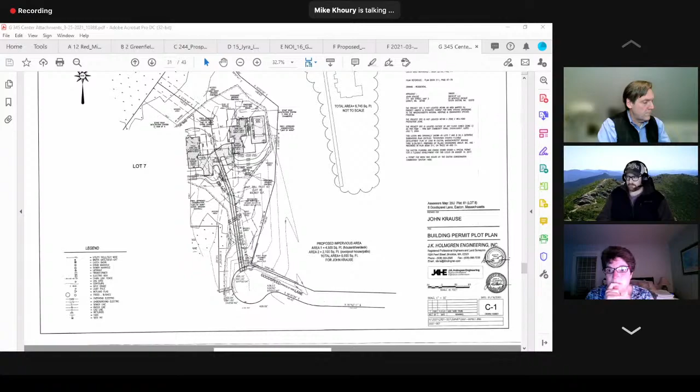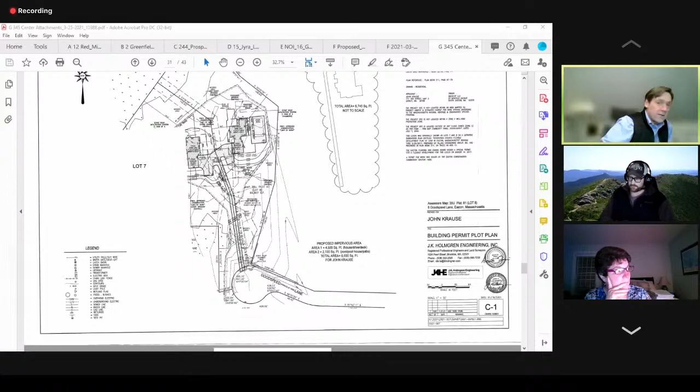Okay, so next up is minutes for February 22nd, and I had something and now I can't find my minutes. I know exactly what it was, let me find it. I'm going to stop sharing my screen. I'm going to take Mr. Corey down to the 10B. No, somebody's already done it.

Okay, so first let's talk about February 8th. The minutes were simply amended to include some documents presented at the hearing, that's the only change, listing them on the minutes as is standard here. One thing I didn't mention at the beginning of the hearing is that any extra material we present as part of our discussion that's not included in the application should be given to the clerk and agent, so we have it for our files in case anyone ever asks. For example, we show pictures from time to time, and if I do it, I send them to Andrea and Tish the next day. That's just a good habit.

So any questions about the minutes amendment for February 8th? None from me. Make a motion to accept the minutes as amended for February 8th. Thomas, second. Roll call vote: Kallfelz, aye, Lundin aye, DI...